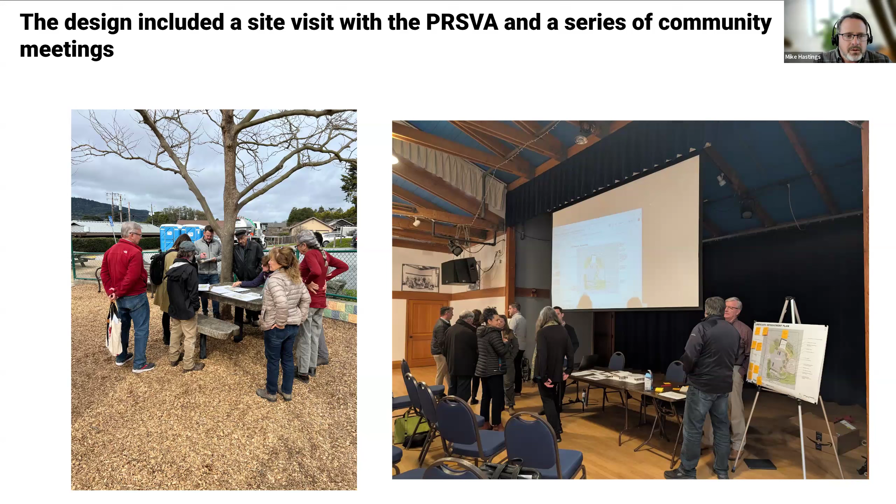As it relates to the building, the project team evaluated a few different roof options, and some stall configurations within the restroom, and then some of the maintenance space and associated components. What you see here is an image of what we showed as the options last time, with the green being the selected options. Chris will go into a little bit more detail on that in a bit.

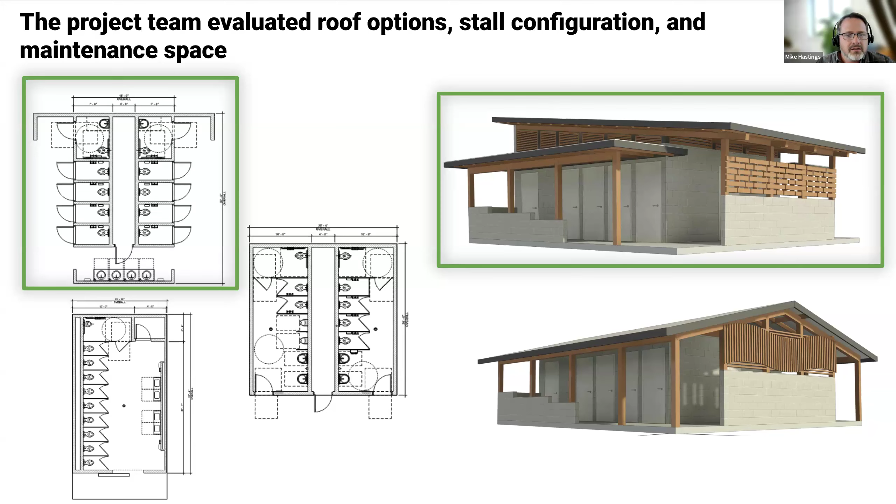Some of the feedback that we received that we've incorporated were 10 new restroom stalls, a gender neutral, family friendly floor plan, low water use fixtures, and a pedestrian path connecting to the Mesa lot. And then we realigned the stairs from the existing restrooms up to the revised site, and also expanded some of the seating options, some pretty cool options that you'll see, and bike parking as well.

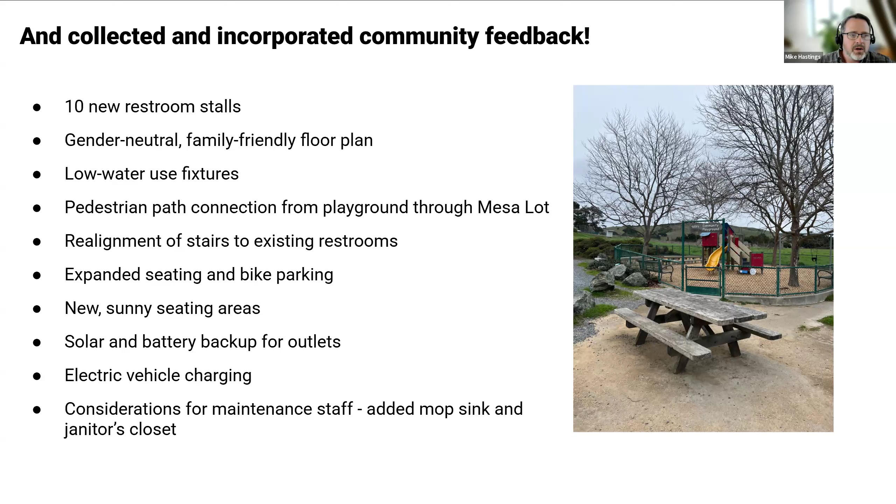We also listened to the feedback about shade and wanted to minimize additional shades. We have some really nice sunny areas. Additionally, there was some solar added - well, we were already considering that, but there's a little more information now - and battery backup for outlets for charging, which will also support electrical vehicle charging. And then finally, some really important considerations for maintenance: a mop sink and janitor's closet, and some other various improvements.

And so first I will pass it over to Kendra, who can talk about the landscape improvements. Great, thanks, Mike. Yeah, so here we show the landscape improvements plan. We will share with you in the coming slides some more details on the landscape improvements in particular, but here we just wanted to initially show you what some of the key elements of the site are before we dive into too much detail.

So starting from the bottom of the image, you have Mesa Road and the town centre beyond. To the left of the page is Toby Street and the point of entry to the parking lot that exists today. To the top of the image is adjacent housing beyond, and to the right is the Mesa lot and the large open field that you see today.

So what you can see in this plan, we'll start with what is remaining as part of this project. There's an existing path and stair that connect Mesa Road and the town centre to the existing restroom facility, which you see there at the bottom of the sheet.

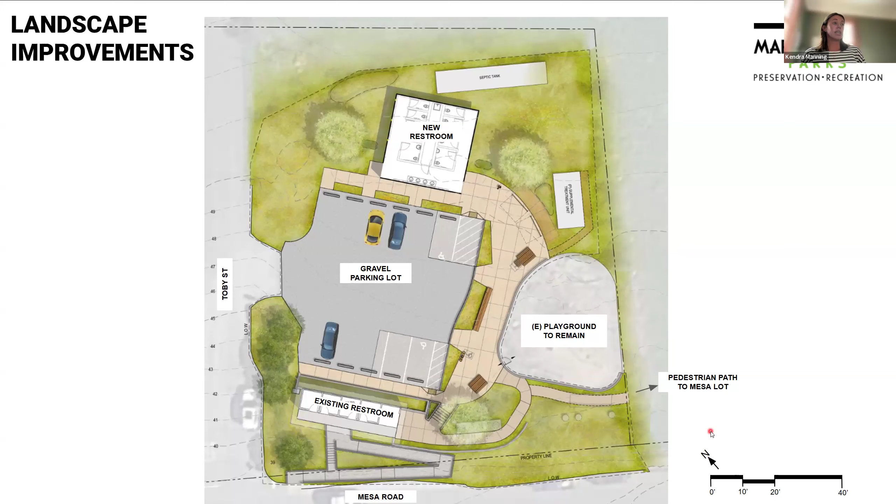Those will all remain, and the existing playground will also remain. You'll also see the gravel parking lot, which will roughly remain the same square footage and size, will remain as gravel.

But we will make improvements to bring it up to standard with wheel stops, striping, and ADA access. The new elements are obviously the new restroom, which Chris will speak to shortly, as well as wastewater treatment infrastructure, which Mike and Alison will go over, and the new landscape improvements, which I'll talk to now.

So starting again from the bottom of the page, you will see the existing restroom, and we are making sure that connection from the existing restroom to the new restroom, the playground, and the new outdoor space that we're creating is nice and clear and safe and accessible.

Currently, the decomposed granite pathway that exists is really degraded and not meeting current standards, so we'll be bringing that up to standard as a concrete path. We're also replacing and reorienting the stairs between the existing restroom and that upper level.

This is to direct people more towards the existing playground and then on to the new restroom, so it's a nice logical progression, with no conflict directing folks straight out onto the gravel parking lot.

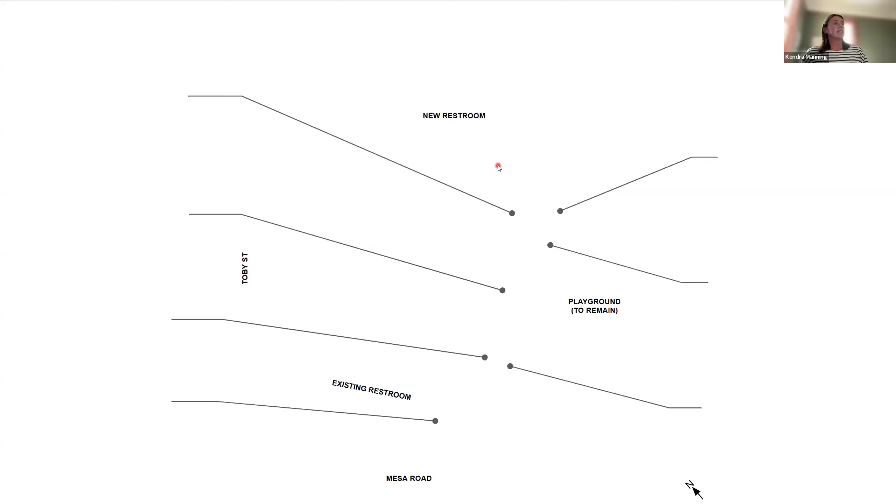If we flick on to the next page, Mike, I will show some imagery, so you can start to see, now that we're at this point in the design, what we're thinking about for sort of look and feel.

We want to make sure that this space is easy to maintain and will stand the test of time. So the picnic tables and benches will be robust, mounted safely and nice and comfortable and safe for users.

Those bike racks that we talked about will likely be the hanging kind, so folks can hang up their bikes, use the facilities, and move on, as we have observed people typically do in this space.

The planting will be native and locally adapted and low water use and easy to maintain over time. And in terms of materiality for the paving, we are using concrete where we need to in order to meet sort of those ADA accessibility standards.

But we'll also utilize permeable materials where we can, so permeable concrete to mitigate stormwater runoff and promote percolation, and also obviously gravel in the new parking lot space as well. So that sums up the landscape improvements.

I'm looking forward to hearing people's comments, but right now I'll pass it on to Chris.

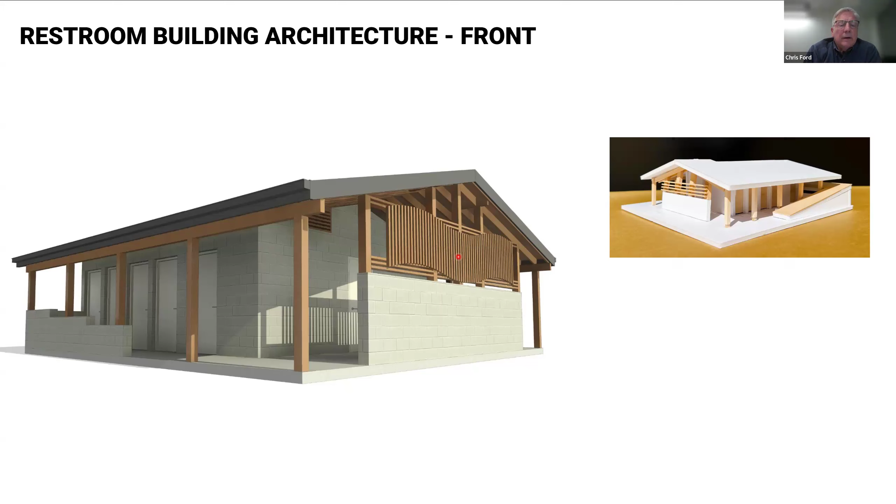I think we've got another image, Kendra. So when you stand at the housing above the project, right now you look down on the parking lot. We fit the new restroom between the existing trees. So the current view from above is the parking lot, the cars, the temporary restrooms that have been added, and eventually the low slung roof of the existing restrooms.

What we're trying to do is really help with the impact of the parking lot to the neighbors above. This will block the sound, it'll block the headlights, and from our study, it'll still respect the overview of the lot to the town.

Thank you. Guys, I just want to chime in. I just got a message that my battery's running low and yet I'm plugged in, so be warned that something weird might happen here. Anyway, carry on, please.

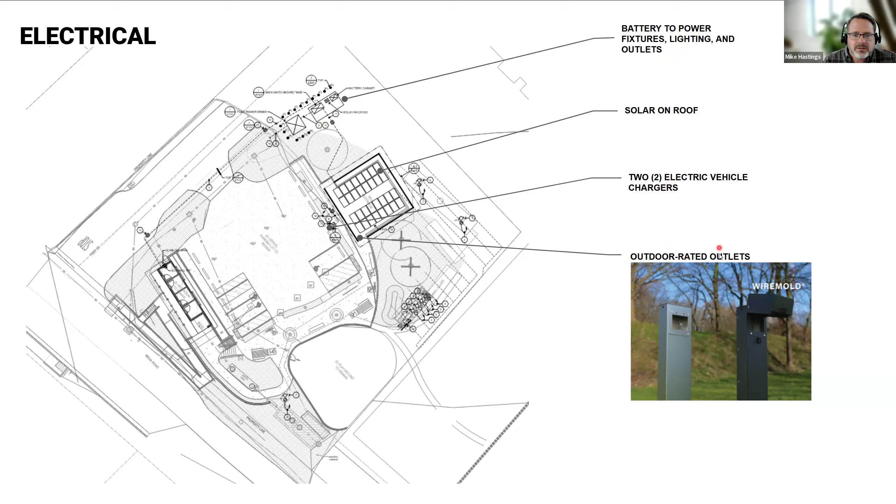Next steps are we will be completing our construction documents, and then doing CEQA environmental documentation and permitting. Those can generally take some time, but we're looking at about 9 to 12 months, into summer of 2026 to get this project starting in construction.

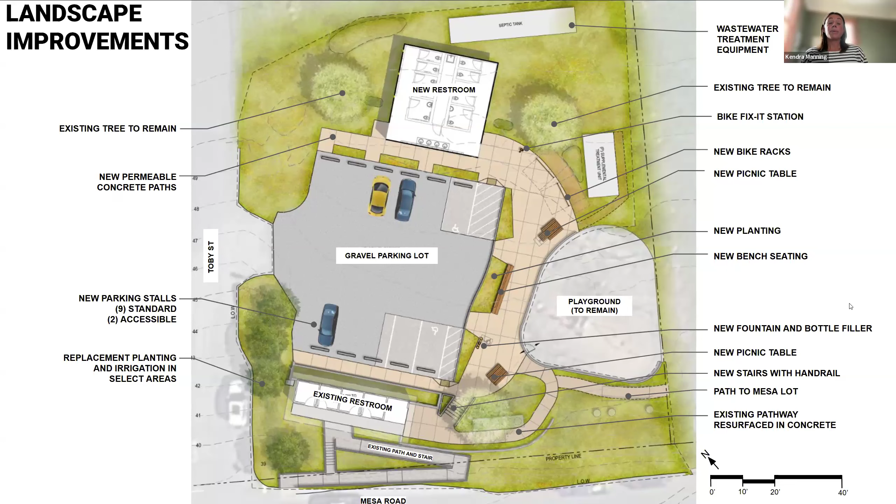Yes, we are hoping to, and we try to do this in a lot of our design, especially in more natural, beautiful areas like Point Reyes Station. We like to use a native palette of planting suitable for the location. Some of the native plants on our list, though we haven't developed the full planting plan, would create habitat for pollinators and butterflies. I say that because there's a program in West Marin to attract monarch butterflies to the coast. And to supplement the bee populations here.

I will follow my comment up with an email to you with more information about that in case you're lacking it. No, thank you, Rob, that would be fantastic. We'd love to connect on that.

The other question I have is concerning water. What happens in drought years? Are we pretty sure that in drought years there'll be ample water supply for the facility?

As far as I know, Rob, I haven't heard of there being a constraint on water, and I know we're talking about using low flow fixtures. Did we lose Chris? Looks like we lost Chris, maybe, or maybe he just disappeared from my screen. Anyhow, so is that something - have you - what brings about that question?

Well, we've had drought here, so it is a possibility - it's a contingency. Just throwing it out there because everything seems to be working now, but in two years that can change. Totally, yeah. I think what we do at all of our facilities during those drought years is, if there's a mandate, then we follow it. And if that means we have to close things, then maybe we look at that.

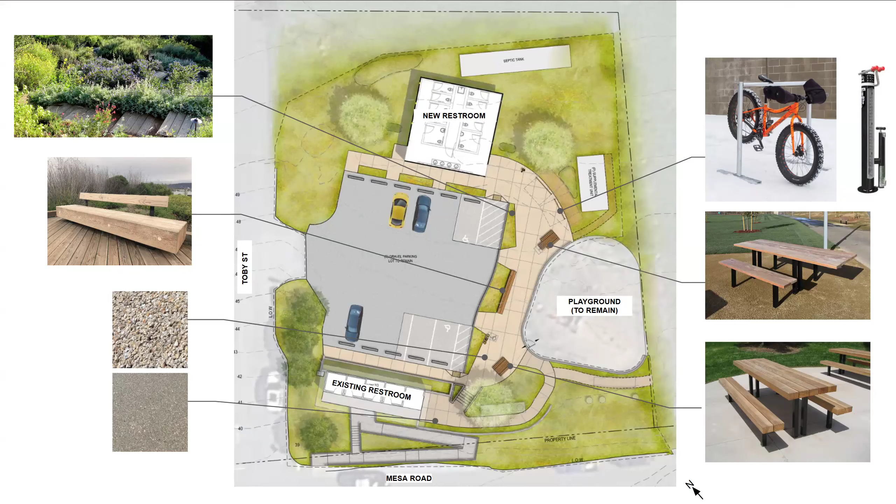The other thing is to thank you for the attention of accommodating the uphill neighbors with the nice plantings, which I think is great. And I know we're only at 30% now of your funding, but I would really like to now look at budgeting to improve the existing 4 restrooms, so the whole thing becomes a whole unit and everything is nice and clean from the beginning, because they really need attention, especially the door locks.

Garbage. Well, I lost that last thing, could you say that again Pamela? The last thing was to make sure that we're budgeting and funding for the existing 4 restrooms. Yes, okay. Because those doors and the interiors - since we're doing the whole thing and it might be a while before we pay attention again to this, it would be great to make sure we're budgeting for improving the existing 4, for making sure we have maintenance to clean these on a regular basis, and some kind of garbage, compost and recycling that'll get picked up regularly. Okay, making a note. We'll bring that into the conversation here in this next step, including budgeting for improvements to the existing restroom and maintenance. Thank you. You bet.

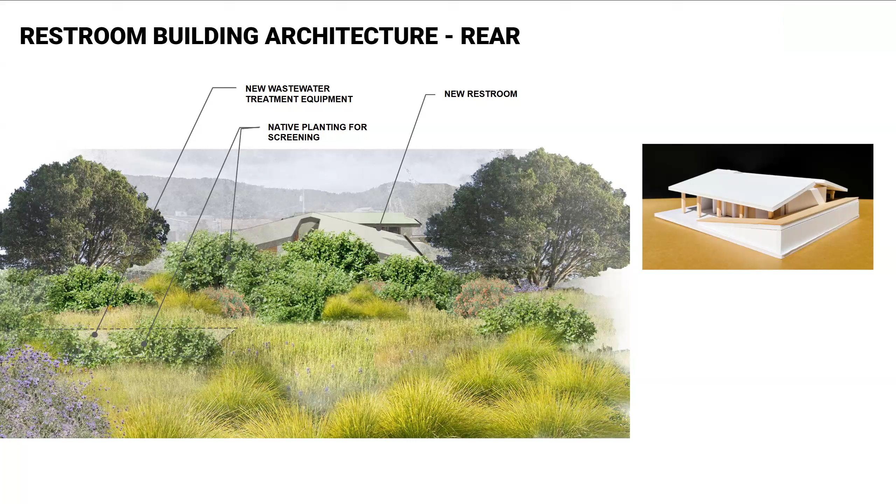Hi Craig, I was wondering if you could go back to the slide that showed where the leach field would be, and also if this presentation would be online. Yes, actually I think for reasons related to accessibility I might not be able to have the presentation uploaded. However, my email address is at the end of this presentation, and if you email me, it's craig.richardson@marincounty.gov, I will email you the presentation.

Isabel, was there a specific question about the leach field, the disposal area? Generally interested in if it would have any effect on water resources. No, definitely not. We're outside of the fairly large buffer, and this will all go through regional board permitting, so we are absolutely abiding by all of those protection zones and laws. All right, thank you. You're welcome.

Okay, well I'm bummed that we lost Gene. Isabel, I want to add one quick thing too - this is actually not a traditional leach field, this is one step up in quality, in that this is a subsurface drip disposal, which is a little bit different than a leach field. The treatment system we saw before is an advanced treatment system, so it makes the effluent cleaner than a traditional septic and leach field system. Oh, that's really good to know. Okay.

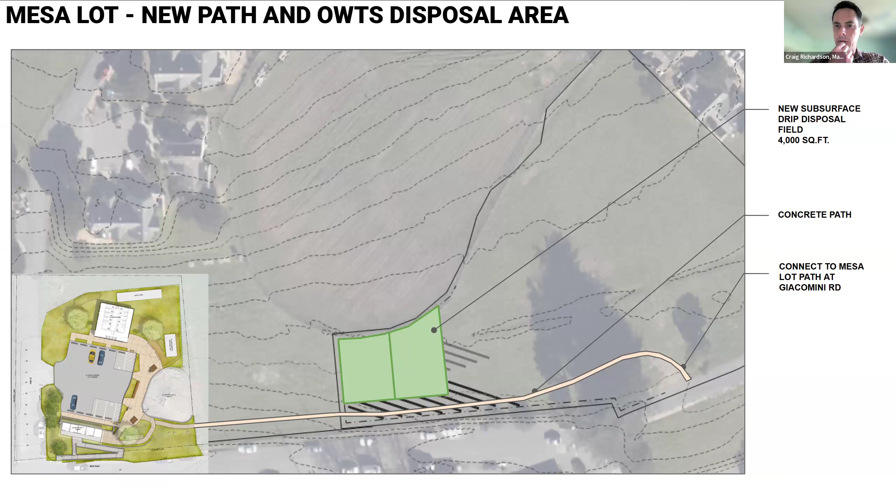Any other questions or comments, any feedback? If not, I just want to appreciate all of your input and engagement along the way. It's been really fun, this project's been really fun because it's been an iterative process where you guys have provided a lot of good feedback that we're able to incorporate. It's been a neat process for me as a professional because you don't always get this level of engagement and good ideas, so it's fun to see it all play out. I'm looking forward to the next steps, I will keep you all informed and engaged, and thanks so much for coming tonight. You've got my email and phone number if you want to talk more. Otherwise, we'll say goodnight.